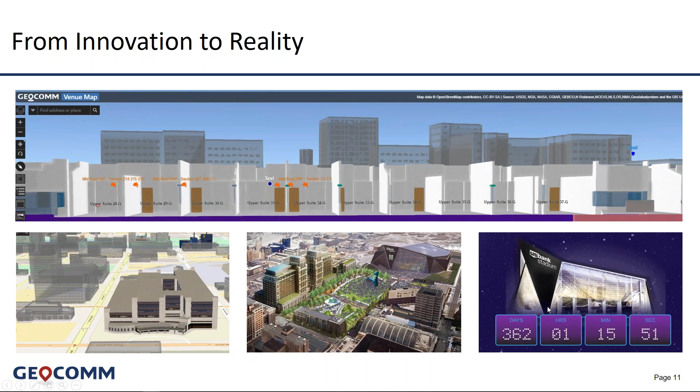So the system itself is a custom Esri ArcGIS JavaScript 4.x API web mapping application built by GeoComm. You're looking at the application on the left side of the screen. This is a web mapping application powered by the Esri ArcGIS platform. So the Esri stack that this system uses is what many of you are familiar with and already use within your own enterprises and already have licensing for.

It's ArcGIS Enterprise, which comprises ArcGIS Portal, the server, data store, as well as we're using GeoEvent Server. We found that ArcGIS GeoEvent Server was just a fantastic hub, if you will, for centralizing sensor feeds from a variety of different sources. So we could create custom input connectors to lots of different types of sensor feeds, and then sort of standardize them through GeoEvent Server, which would then publish stream services, which could be consumed in our web mapping applications that were powered by the Esri JavaScript API. So GeoEvent Server is really a critical element of this.

On the data authoring side, in order to build the maps that we provision in these applications, we used ArcGIS Pro.

We also use ArcGIS Online for base maps. And then we also use Drone2Map for ArcGIS to capture some highly detailed 2D ortho imagery in and around the stadium, as well as to create a 3D exterior model of the stadium.

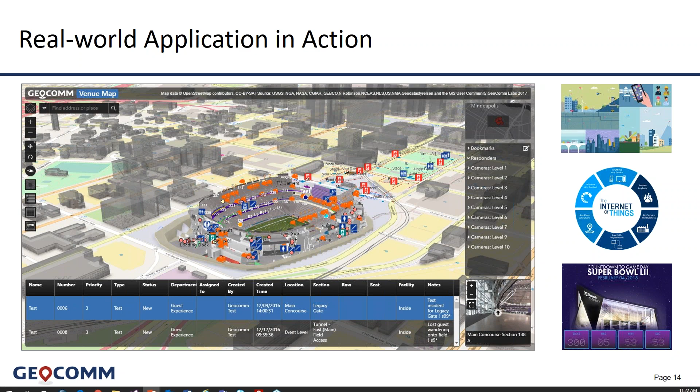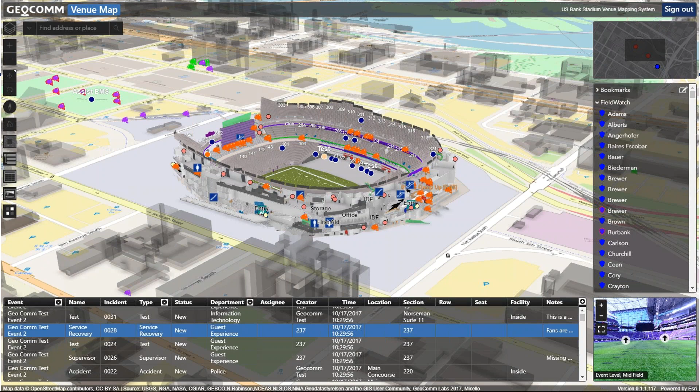Here's a full page view of this application so you can see it better. The idea is that as incidents are added into their incident management system - think of it as their computer-aided dispatch system - you enter an incident in the CAD, and as soon as it's entered, the incident automatically appears in a grid underneath the map. A dispatcher can then click on that location and zoom to it on the map.

So here we're looking at an incident on the event level related to a bike valet. We click on it in the grid, and we automatically zoom in on it and the 3D and indoor map of the venue.

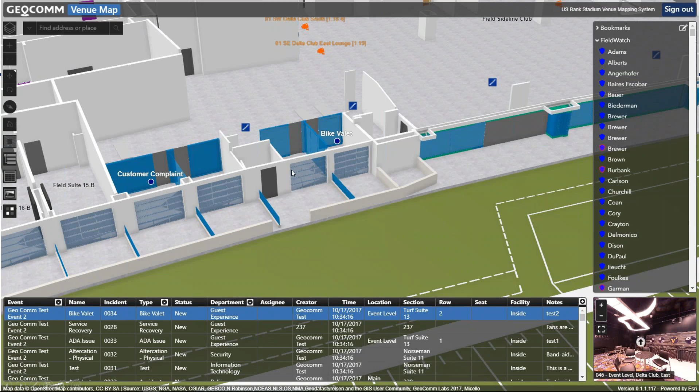In addition, there's also a panoramic image survey of the stadium that we've loaded into the map as well. This is sort of like a Google Street View except indoors. You can click anywhere on the map at the location of an incident or elsewhere, and in the lower right corner you can see a panoramic image view that we can expand to see what that location of the stadium looks like.

There's also, you'll notice, camera icons on the map. We can click on any of these camera icons to see the video feed from that location on the map. I'm not going to open a live camera feed as I'm not connected to the stadium network presently, and also for security reasons.

One of the things we discovered operationally was that due to the sheer number of cameras in the stadium, a map of camera locations combined with a map of incident locations makes it really easy and fast to get to the right camera feed quickly. Otherwise, if you're just looking at an incident location with a tabular list of hundreds of cameras, it can be difficult to pick exactly the right camera.

But using a system like this and the GIS, you can clearly see an incident location, see the nearest camera location, and click on it to get to the feed. Now, if you want to see what things look like on the ground at that location, you can expand the panoramic image survey for the location to see what it looks like.

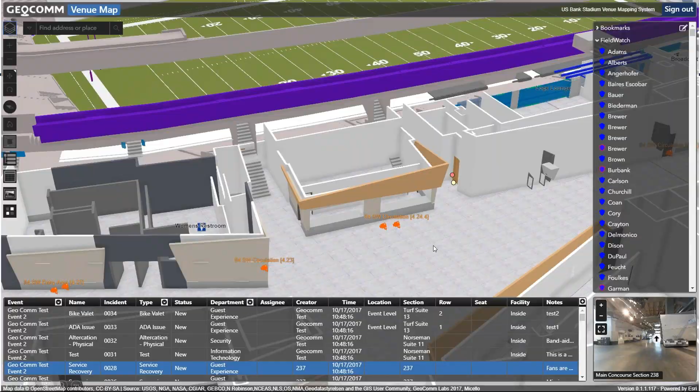And that's what we're looking at now. This, of course, is just like Google Street View except indoors—we can pan and zoom around inside this panoramic image. So this could be useful when you're planning a tactical response. For example, if we're entering this section here, we might stage Britt and John over here, and put Mike around the corner.

We might plan and coordinate our entrance for a particular type of event. So the panoramic survey images are static, not real time—they're captured ahead of time, but it's another way of understanding ground truth, what the structure looks like, as well as entrances, access doors, corridors, which can be very useful in a tactical dispatch situation.

The key is really linking the panoramic images and geographically indexing them, so that if you click on an incident entered into the incident management system or the CAD, you can automatically queue up or pop open the panoramic image for that particular location.

So while this system really focuses on a single venue, we know there's a lot more critical infrastructure in the city of Minneapolis that could be mapped and added to a system like this. For example, as I'm just flying over the city and zooming in a little bit, we begin to see more detail.

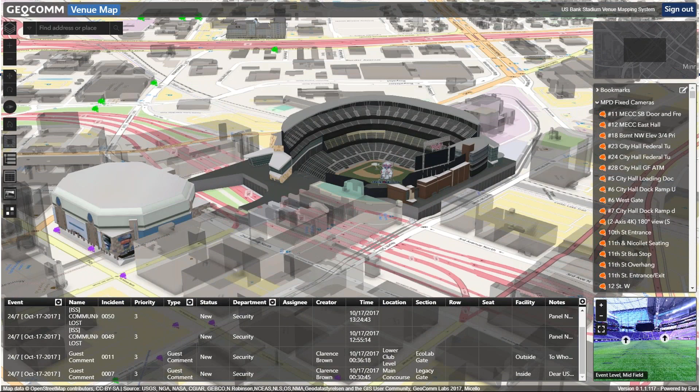Looks like we're getting close to another stadium. In fact, there are other sports and entertainment venues in the city of Minneapolis—there's Target Field that we're looking at on the map, and also the Minneapolis Convention Center. You can probably think of a lot more venues and public spaces that might be useful in a PSAP situation.

That leads to our next question for the audience, the next poll question.

Okay, terrific, so looks like there's lots of interest in mapping public schools and hospitals as well—not a surprise there, but very interesting nonetheless. So we'll advance to the next slide here.

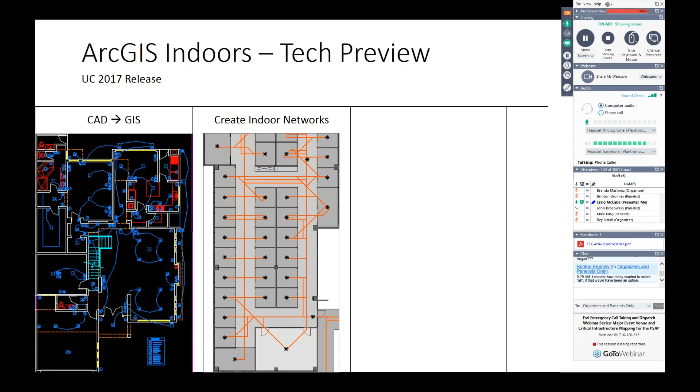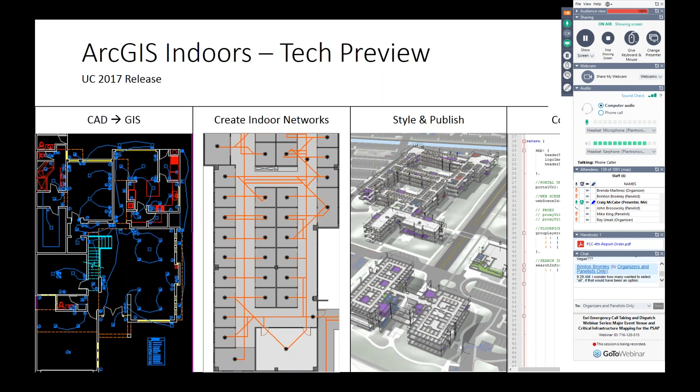These transportation networks are an essential component of an indoor map or 3D model and can be used to find people, places, or equipment inside a building. Next, you can symbolize and publish your 3D GIS layers, your indoor network, for use in the application. And finally, configure the app - set up your floor switcher, fonts, labels, logos, that type of thing.

So the first step is just getting the data in. This is a big hurdle for a lot of people. In the latest release of the template, we use a configurable spreadsheet so that you can map your CAD layer names to your GIS attributes, and no longer require firm adherence to AIA layer naming standards.

It's very flexible. By supplying relative Z information for each floor, when you run the tool, the output features are then 3D enabled. So you essentially get your building footprint polygon, which is the greatest extent of all your floors.

You get your floor or level polygons, your units, and your detail lines—so where walls, doors, columns, and that type of thing are.

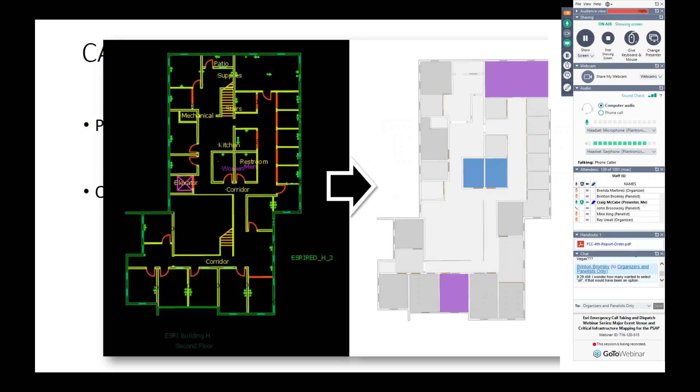Once you have all your GIS data populated, you can either use it to create a 2D map or leverage that Z information, that relative floor level, to create schematic 3D representations of buildings.

Once you have all that in the system, next you can build a transportation network. This is a mostly automated process, and there are a lot of benefits to creating an indoor network beyond routing, like other network analyses such as service areas and vehicle routing problems.

Oh, it looks like I'm getting some messages here. Do we have a connection issue? Hi Craig, we hear you just fine, but can you hit the orange button at the orange arrow at the top? For some reason we're seeing your panel. I'm not sure why. Thank you. Sorry about that. No problem.

So for network, beyond routing, you can do service areas, vehicle routing problems, location allocation, OD cost matrix—these are all helpful pre-planning tools to optimize the efficiency of a building or its occupants. Routing is the first thing people think of, but once you have a network in place, there are a number of other optimization and planning workflows you can go through.

There are inherent challenges to networks. First of all, they're time-consuming to create—you can't just download your building's network from OpenStreetMap, though maybe someday. Currently, they also require custom applications to consume and display various services or indoor layers.

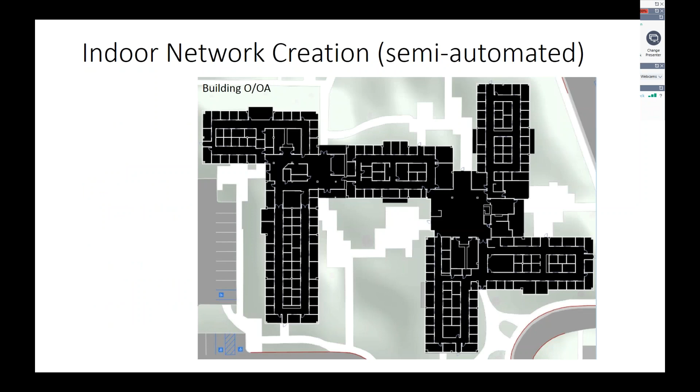So the circulatory system of the building, this transportation network—let me go through the process of how we automate a lot of this data creation. We start with a lattice-based approach.

This is one of our development buildings here in Redlands. We apply this lattice to the floor, and now we calculate a near distance—essentially every lattice point in this building knows how far it is from a wall. So we can prefer routes that go down the middle of the hallways, for example.

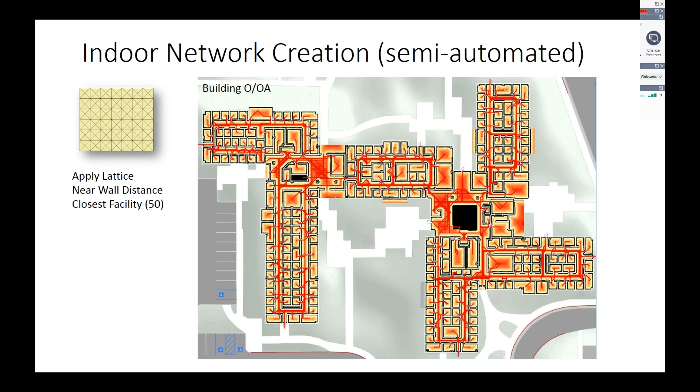That's where people tend to walk, so you want naturalistic looking paths. We add in all of our network locations—these are just room centroids.

And we use those to pre-calculate along this lattice, this substrate, all the possible pathways inside a building, including pathways to all the exit points on the ground floor.

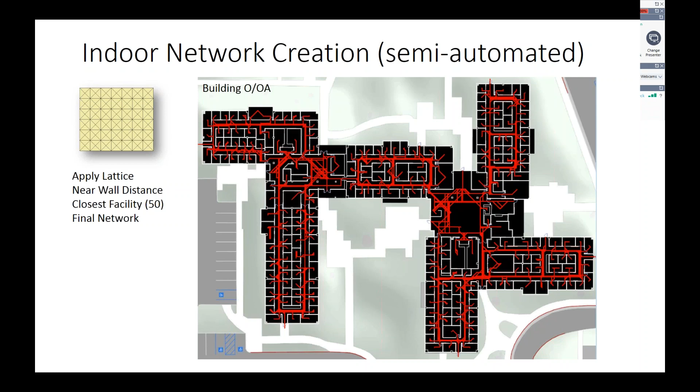What we get then is these three stacks—in this case we have a 3-floor building. We can connect them up with transition features, so stairs, elevators, other transitions, and then deploy this network.

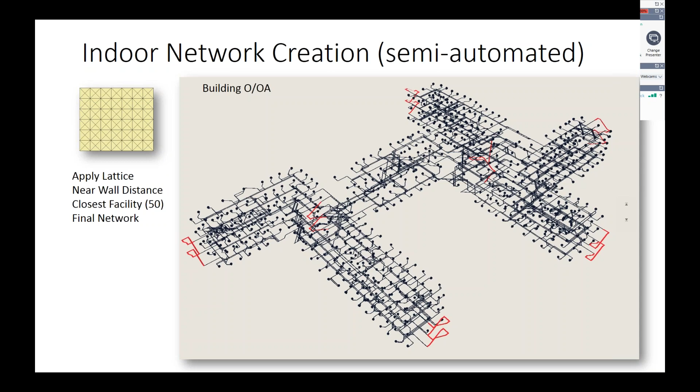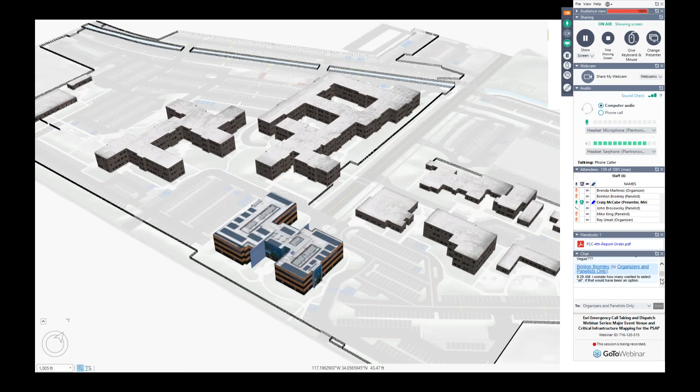And so for the Esri Redlands example—make sure I don't have a message here. Let me just move this. There we go. We have 20-something buildings on the Esri Redlands campus.

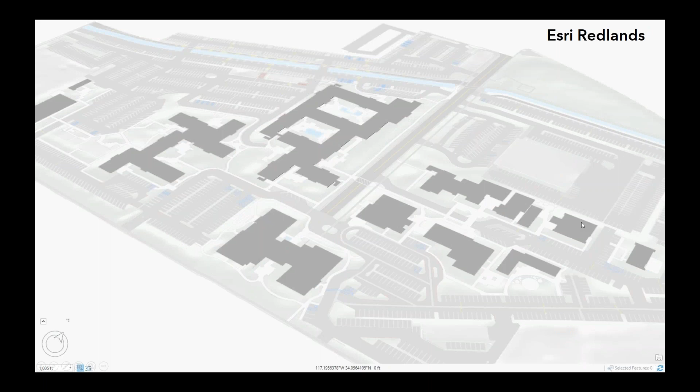What we can do is strip away the building facades. We create all these indoor network data sets, and we can run them in batch mode, so we can actually create all of these at once.

We add our transition features to connect floors together. Then we add in our outdoor pathways to connect all the buildings together. And then we can add in other networks.

So we have a parking lot network essentially that extends into every parking space on campus. We can actually route from your car to your office, or even connect up an external street network, essentially having a multimodal network.

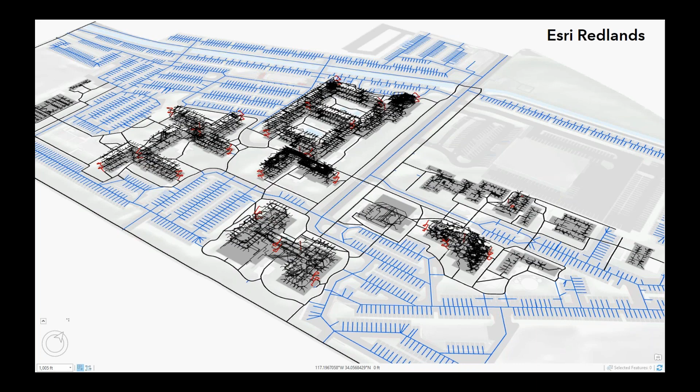So we can dispatch from a fire department directly into an office.

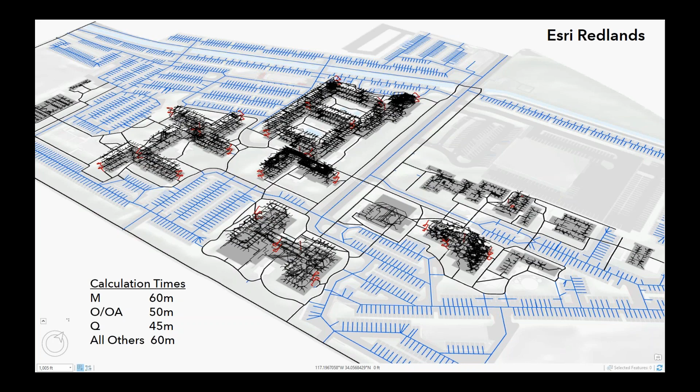Just a sense of how long it takes to calculate this kind of network—it's about 4 hours of calculation time and another several hours of manual connections and QC. So those are our 3 main buildings.

That said, I want to show you how this all comes together using the Esri Campus Viewer web app, which comes as part of the template. So I'm going to switch over now.

Let's click on the link. So this is a JavaScript web app, runs in a browser using the latest JavaScript API, and this is our Esri Redlands campus.

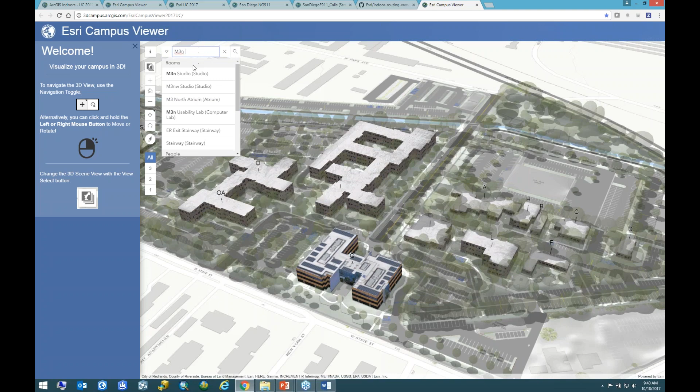It's pretty straightforward as far as how you use the application. You can search for people or places, and you can see there's categorized search options here. Let's say I have a meeting in the M3 North conference room, so I can just type M3 North conference room. I'll click on the match.

Once I click on that link, the app zooms to our location of interest, removes the textured facade, replaces it with a wireframe, and the room location is highlighted.

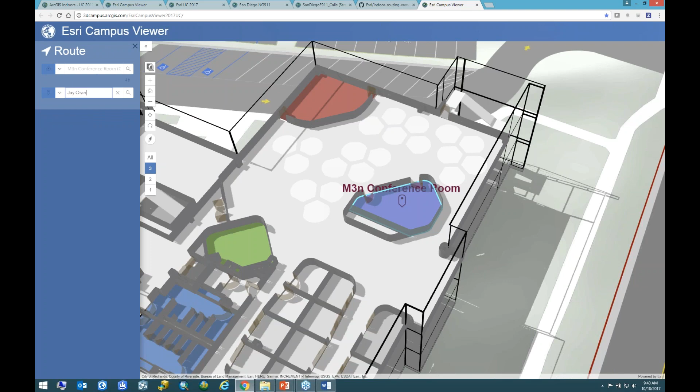Now if I want to create a route, I can route from here, and I'm going to go to see my friend Jay Orange. He's over in Q.

Now we've zoomed to our destination location, and a route is generated across campus here. So we're starting on the 3rd floor, and I know the connection speed might not be great, so I won't move it too much. But we start on the 3rd floor of M, come down to the stairwell here in the middle, across to building Q, and take the outside stairwell up to Jay's office here on the 3rd floor.

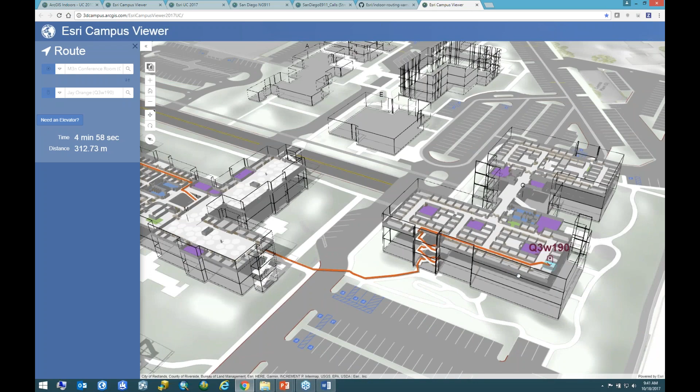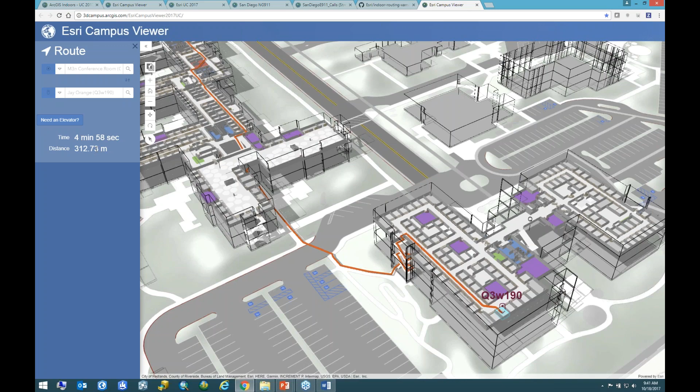With this new JavaScript API, we have the ability to filter 3D content, so we can just show the floors of interest that we need to see, or the buildings of interest. Pretty powerful. You can see here there's a summary of the walking time, about a 5 kilometer or 3 mile an hour walking speed, as well as the distance between those two locations.

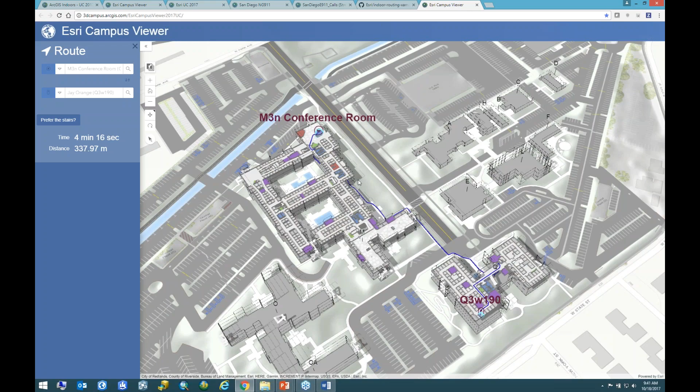So if we want to get an elevator, we can just click a button here. It'll recalculate the route using a different restriction. Now we have an elevator-only route if you have mobility restrictions. So you can see, again, coming down the elevator shaft in building M, coming over to Q, and now going up a different path to get to Jay's office here.

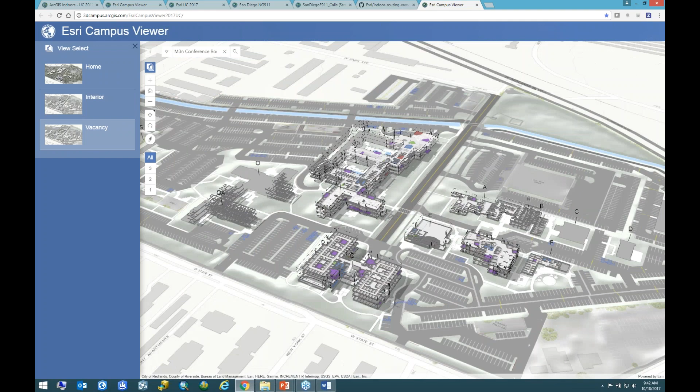Very powerful application and very customizable. We can add additional slides for operational views you may want to share. In this case, we have services that tell us what office is occupied, so we can get kind of a space management view of our campus at a click. You can add any number of slides you want for your campus viewer, for example, an evacuation plan or meeting areas or parking map or visitor points of interest, that type of thing. It's really customizable and extensible.

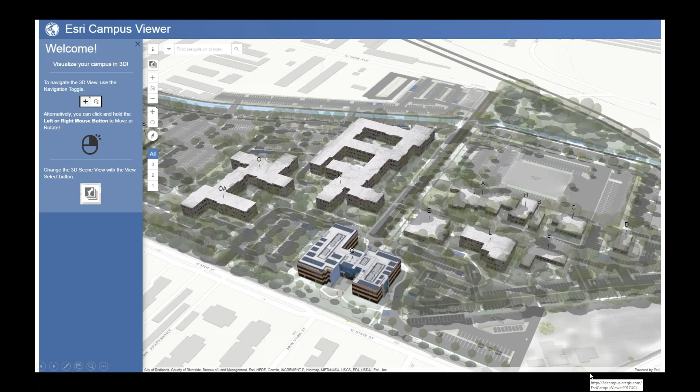So let's go back to the deck and go with a question for the audience. I'll give it 30 seconds or so.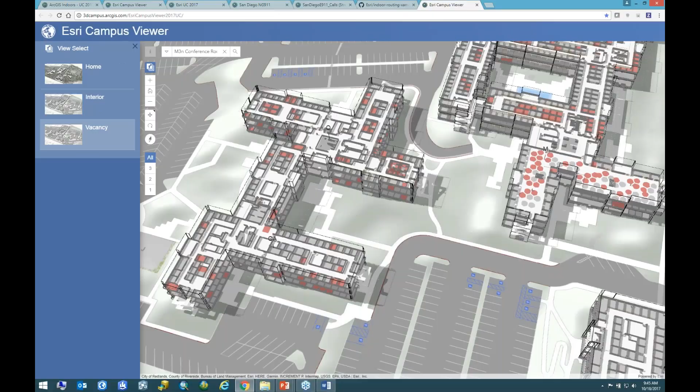In our previous example where we were looking at occupants, now we want to switch over a little bit and look at schedules. We want to know what's happening in any one of the presentation rooms. So instead of using an employee table, now we have an events table. It's kind of a different skin for the same application, we just swap in a different service for our events. Now I'm going to go to the UC version of the Campus Viewer application.

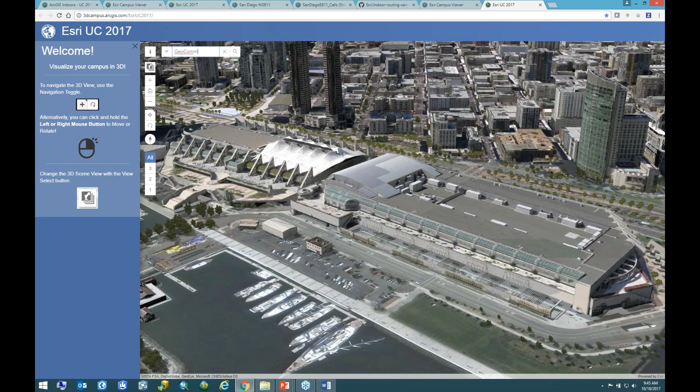Now we can actually search for events. Let me search for GeoComm, which was at the user conference and had a booth on the expo floor. We can click on the company name there and see exactly where their booth was located. This is very valuable for getting awareness of where exhibitors are and where different tech workshops are happening.

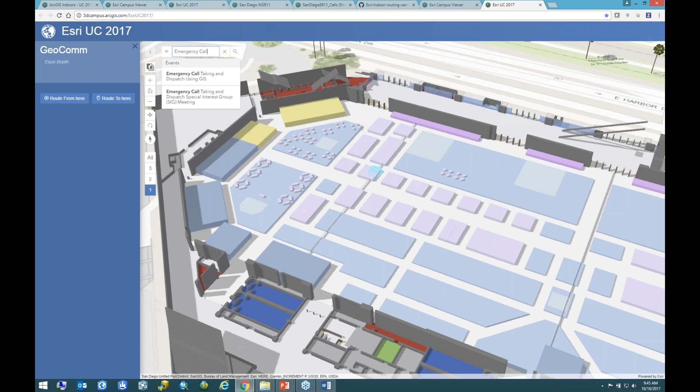If we do a different search here, let me search for an event, let's see, emergency call taking and dispatch using GIS. We can now find this session, and let's say we have to route. You can see here it's taking information from this service that tells us the start and end time for that session in that room. So I want to route from here to, let's say, CityWorks, another vendor booth downstairs.

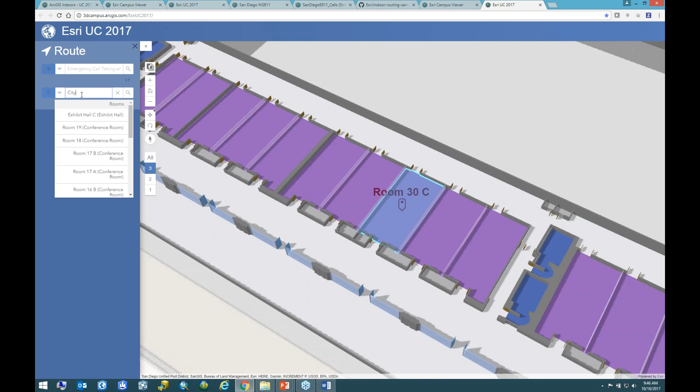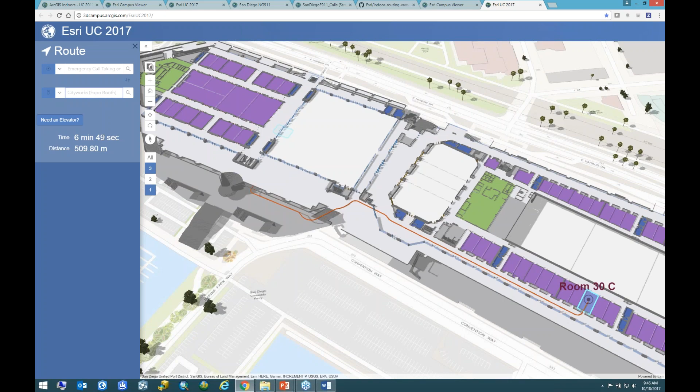We can now calculate a path between these two locations and then follow it. You can see the convention center is a large building, and it's almost 7 minutes to get down to the booth. So if you have a meeting, plan ahead, that's half a kilometer away.

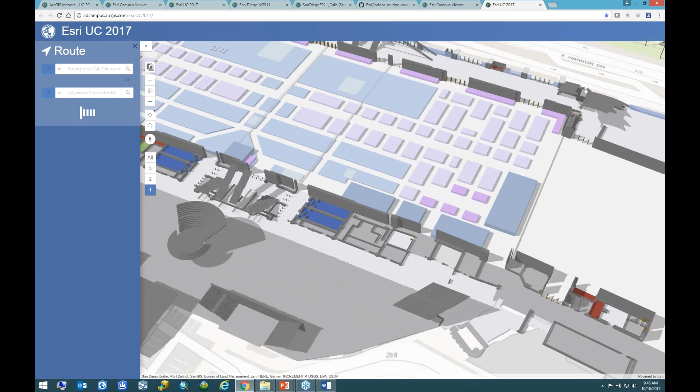We can now strip away the third floor and see the pathway down the escalator over to CityWorks. We could change to an elevator, similar to the other application, and see the slightly different path we take, as well as the travel time.

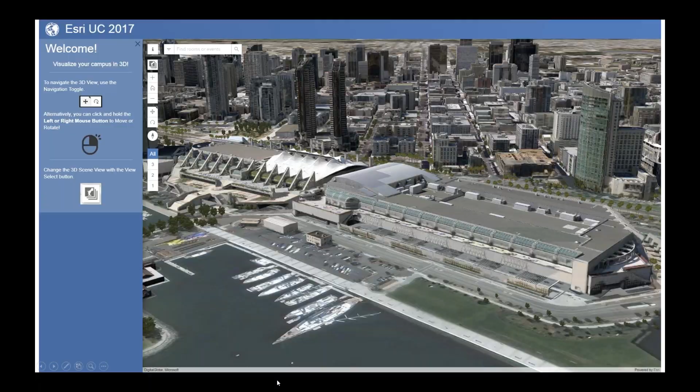One other example I wanted to show here is, from a dispatch perspective, this demo was put together by the Applications Prototype Lab at Esri. It uses scene layers for San Diego in combination with GeoEvent Server to plot the 3D locations of 911 calls that are coming in.

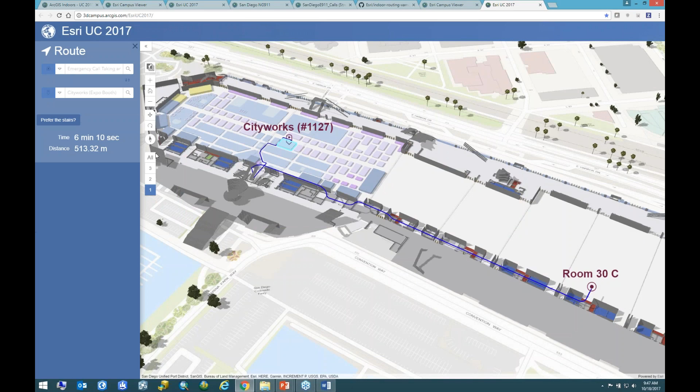I'll go back here, and you can see this is running live right now. Let me just reload it to show you. So what we have is a GeoEvent server serving out call locations, and coming along with the call locations are uncertainty spheres. Let's look at the legend for that. Essentially, it's taking the X, Y, and Z uncertainty and creating a confidence sphere around each call location. So this is important.

Let me go back here. We can see our calls coming in. We can click on one of the dispatched items, and if we zoom in, you can see this uncertainty sphere and approximately where that call is coming from. This information is coming from the request, and it's being plotted on the map in 3D along with that uncertainty information.

You can imagine from a dispatching perspective how powerful it would be to click on the building and show the actual floor plan, the 3D interior floor plan of that building, and select out those floors that intersect with those confidence spheres. Then calculate a route from the police or fire station, which we have also in the map, to those locations automatically.

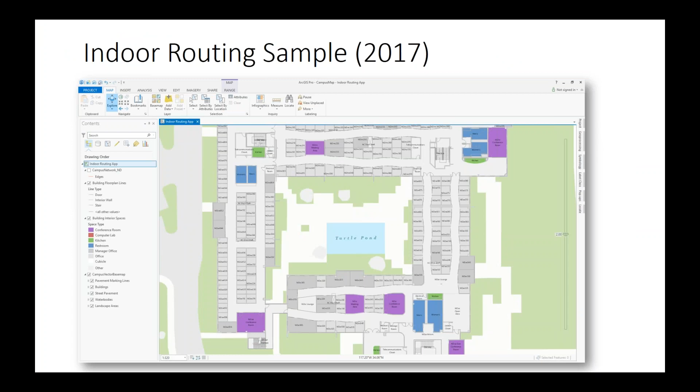So let me go back to the final sample. We actually took all this indoor data that we're developing for our 3D apps, and as I said, once you have 3D, it's very easy to go 2D. So everything gets flattened out, and we can publish these out as a mobile map package that gets hosted on your portal or ArcGIS Online.

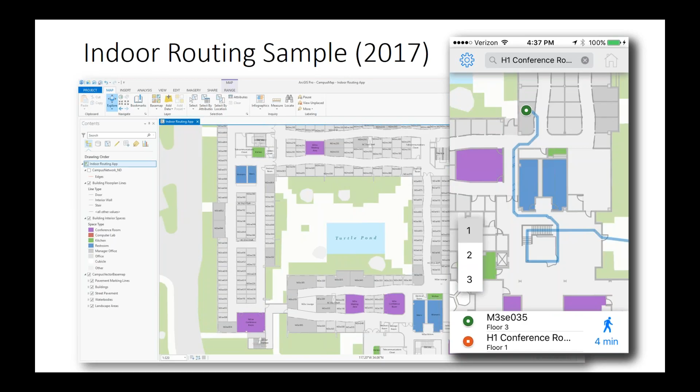This mobile app downloads the mobile map package, and within it contains all the employee information, space information, and the network itself, so that you can calculate routes between buildings just as you do in the 3D app, in the 2D app in your pocket—again showing you step-by-step directions.

So that was a quick tour of some of the 3D and indoor mapping work that my colleagues and I are working on here at Esri. It's a really exciting topic, and we'll be releasing some of these new apps and capabilities coming in 2018. But I wanted to hand it off now to Britt Bromley for some other wrap-up information here.